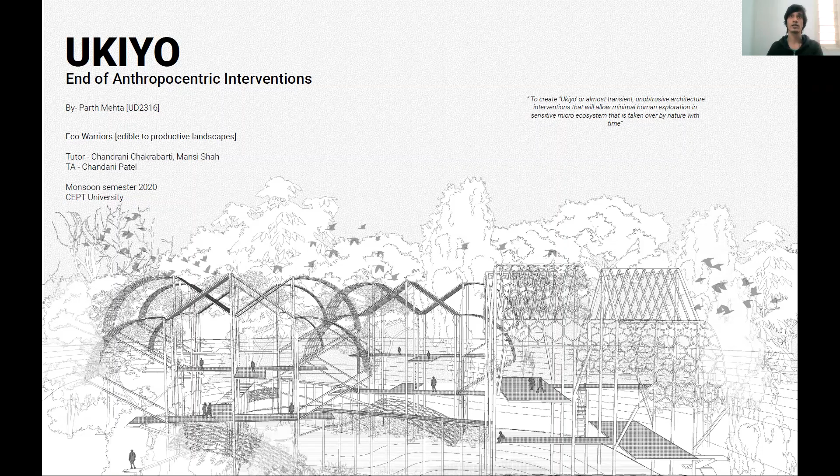Myself, Parth Mehta. I'm a student of Bachelor's in Urban Design, and for the next 7 minutes, I'm going to talk about Ukiyo, defined as transient world. The project Ukiyo, End of Anthropocentric Intervention, tries to achieve an ideal space for sensitive microecosystem with minimum human exploration.

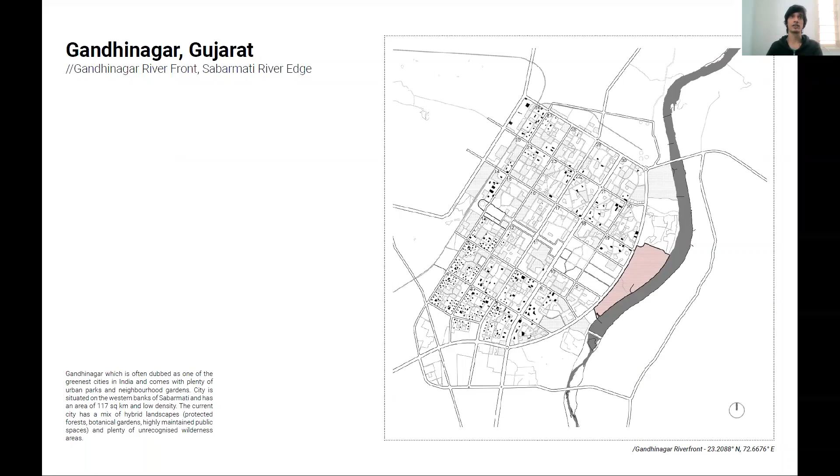The site is located on the western edge of Sabarmati River, in Gandhinagar, known as Green City. Gandhinagar has plenty of urban parks and neighborhood gardens. Cities with a mix of hybrid landscapes such as protected forests, botanical gardens, and highly maintained public spaces also consist of unrecognized wilderness areas. Due to the geography of the site next to the riverbank embanked by dam, the water level on the edge of the site is preserved. This has provided soil enough moisture throughout the time to preserve the green and allow different species of trees and vegetation to survive.

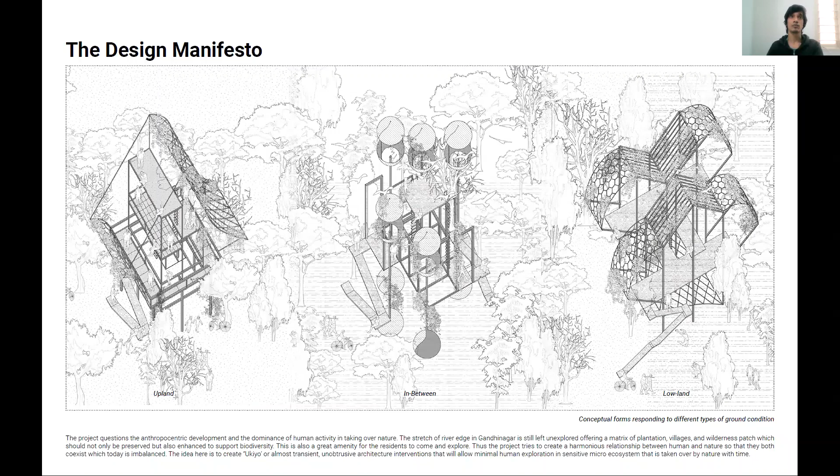In order to create a harmonious relationship between human and nature so that they both can coexist, Ukiyo, almost transient, unobtrusive architecture interventions are introduced. The design methodology addresses the importance of preservation of existing and exploring potential spots for sensitive interventions. On the right is a step-by-step process and considerations made by detailing the master plan.

First step was to analyze the existing topography and land cover. With that, overall swale and water catchment network was formed with juxtaposition of natural trails. With extremely less footprint of less than 1% of overall site, architecture interventions were introduced with respect to the different ground conditions.

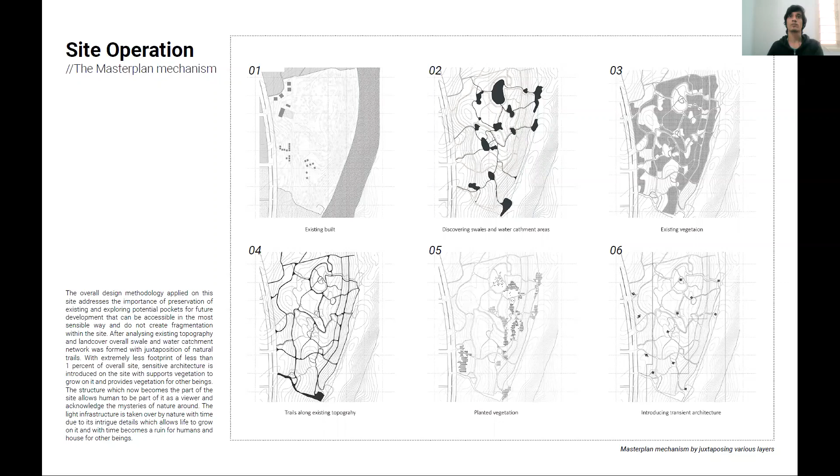Gandhinagar riverfront is spread across a vast area, 1.4 kilometers in the north-south and 1.2 kilometers in the east-west direction. The transient architecture is based on the response to the ground condition that defines the nature of microecosystem existing on the site. The master plan of the patch near J Road is upland patch.

In the center, due to existing topography, there are areas where water gets collected during certain months of the year, allowing varied vegetation to grow, and acts as a habitat to many birds and organisms. We call it in between. The hatched area at the river edge is riparian zone, hence it's preserved.

The small fragmented patches are introduced with varied plantation palette, which can provide feeding zone for many birds and small organisms. Walkable trails are explored with minimum cut and fill that allows exploration across site. Existing trees are left untouched, considering the habitat of various other beings.

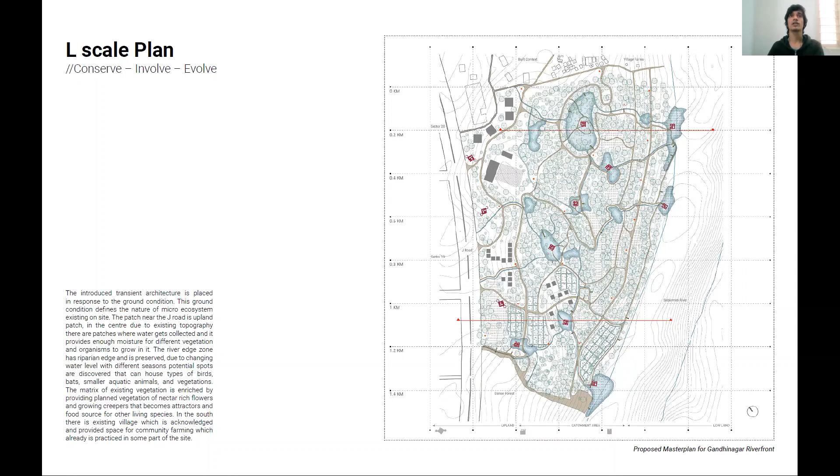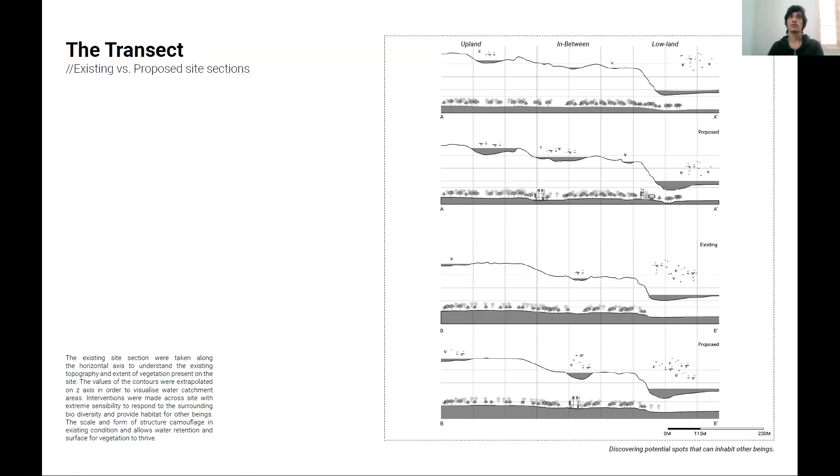The image shows the existing and proposed site section along horizontal axis. In order to represent depth of the site, the value of the height is extrapolated into z-axis in order to visualize the water catchment areas. The balance is created in the scale of existing nature and intervention, such that it camouflages in the wilderness. This allows water retention, surface of vegetation and habitation for birds, small mammals, insects, and more.

The attitude towards bringing nature back in the city is confined to sparsely developed parks or very high maintenance formal landscapes. But here, giving back to nature is by inhabiting architecture in the ring of wilderness. Uplands are the areas lying above the elevation that represent the vast majority of land areas, including rock outcrops, scrublands, grasslands, and dry forests. Such landscape is introduced with architecture specific to it.

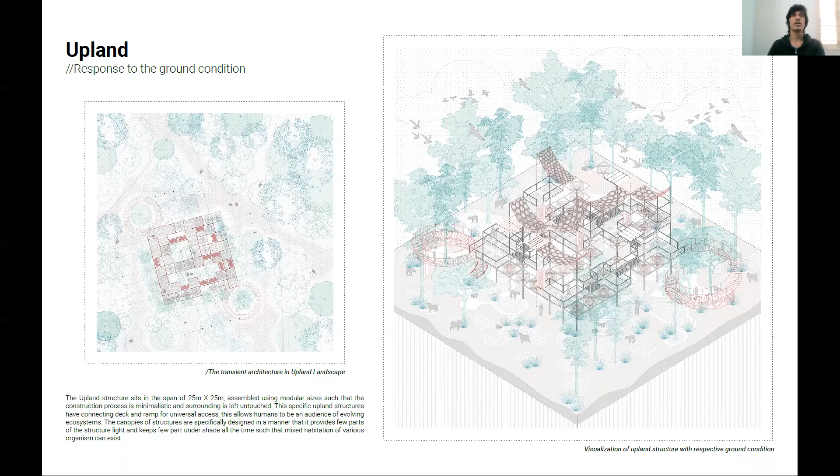The structure spans 25 meters in XY axis, assembled using modules, in order to minimize disruption and leave maximum spaces untouched. As visible on the isometric drawings, ramps and decks are provided considering connection across structure and different levels. The upland structure tries to bring nature in and acts as a foraging ground for various organisms.

With grasslands and dry forest around, the height of the structure is restricted to 15 meters to camouflage with trees around. The canopies of the structure allow light to penetrate and also provide shade to certain parts of the structure. This allows mixed conditions for varied biodiversity. The decks provide a viewing experience for nature enthusiasts and porous volumes allow accessibility across modules for other beings. This structure is then a framework for life to grow on it.

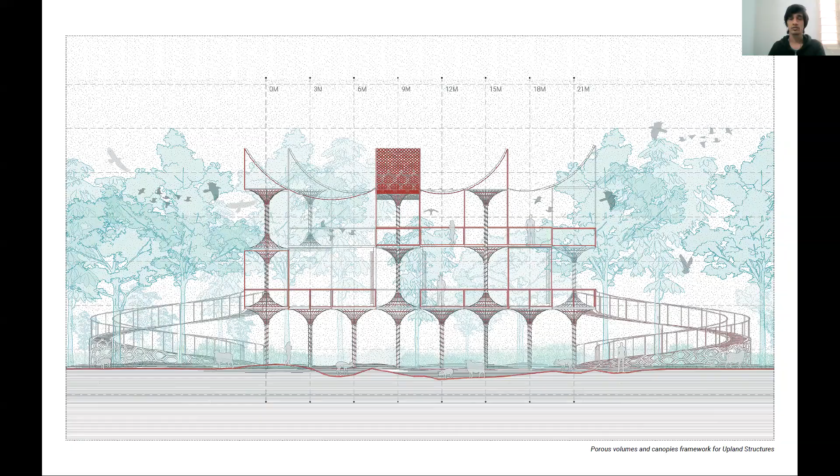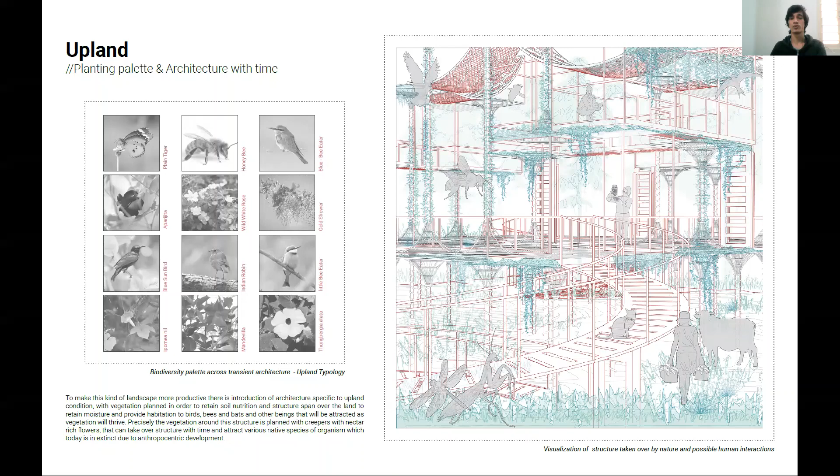The in-between landscape provides many societal benefits: food and habitat for fish and wildlife, including threatened and endangered species, improving water quality, shoreline erosion control, and more. The porosity of the structure allows light to penetrate to the ground surface, with limited decks and an exclusive layout of staircases. Humans are restricted in parts of the structure, while wilderness will grow with time. The accessible decks are spread in a manner that allows only visual access to humans.

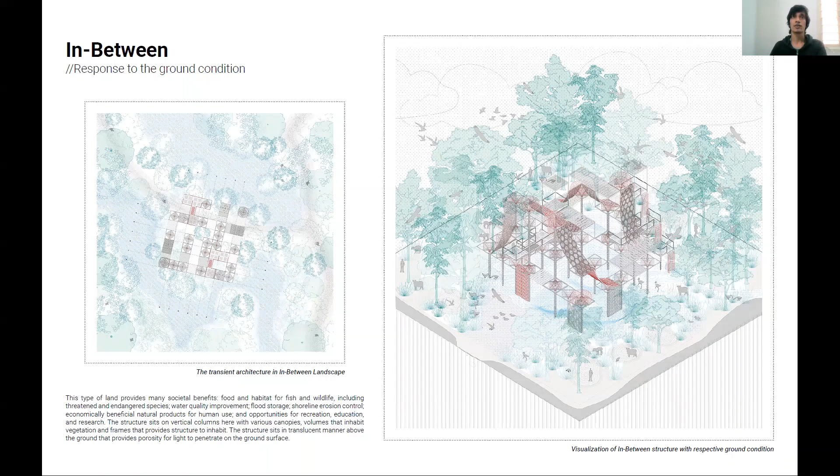The canopies are framed across the structure in a manner that habitat can be created on each and every level. The structure sits in between soggy soil, water-loving plants, and water. With availability of water, vegetation can thrive throughout the year, which allows food for other beings that will inhabit the structure. The form is achieved considering utmost porosity and frame structures that are inspired from nature. These different types of framework are suitable for different species. Hence, with time, the structure blends in nature and a functional microecosystem evolves.

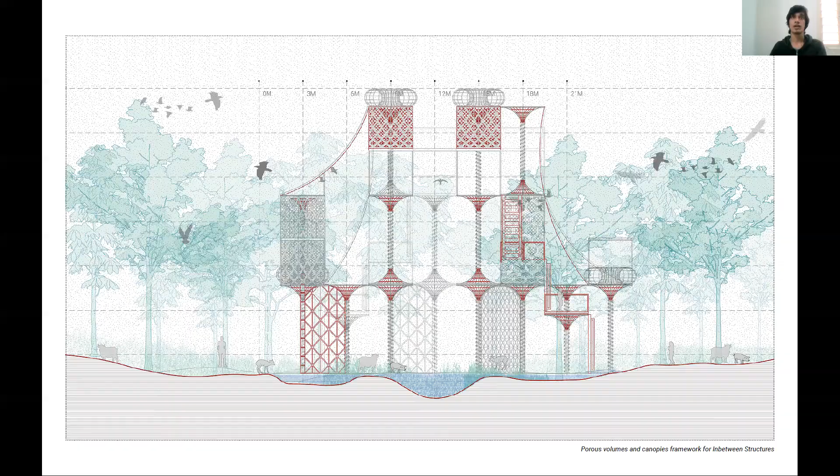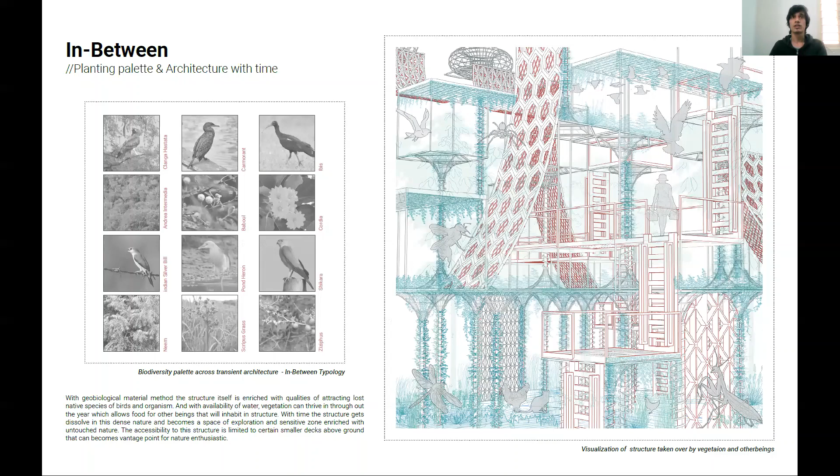A rich native vegetation palette is introduced here in order to enrich untouched nature. With nectar-rich flowers and habitat, birds like shikra, ibis, and many more are attracted. On the right is an illustration of nature taking over the structure and using the framework to let nature thrive by itself. The space between becomes valuable in terms of the life it offers to other beings as it sustains.

Here, the interface between the land and the river is rich in the terrestrial biome found at the Gandhinagar riverfront. The edge encounters different water levels across the year, and hydrophilic vegetation has thrived on the soft edge. These zones are conserved due to the riparian quality. The structure stays on columns across the river edge and partially touches the river bank. The structure with dense framework allows water plants to grow, creating a biofilter and stopping excessive pollution entering during surface runoff.

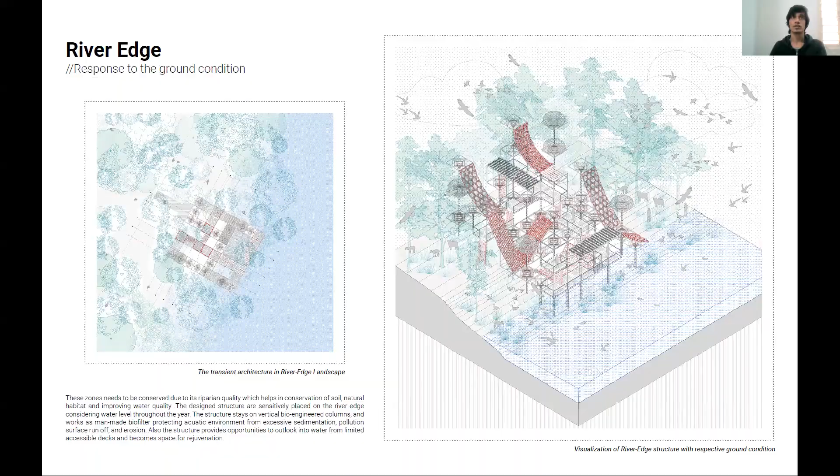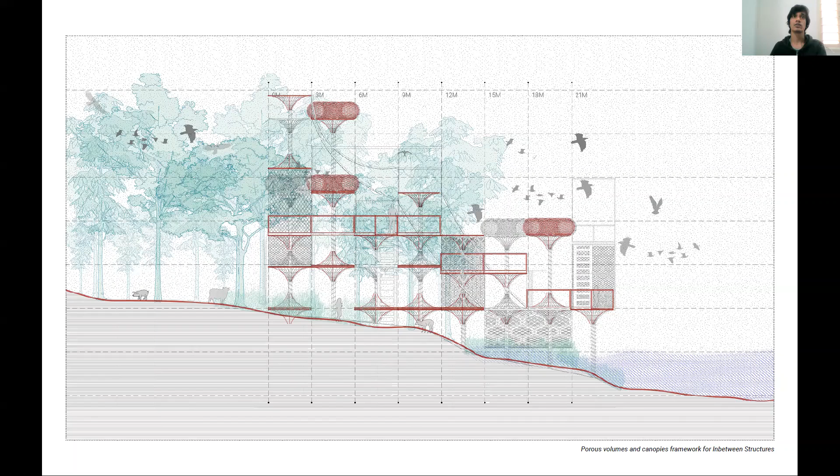The river edge structure with its large open canopies and framework underwater provides foraging and feeding ground for the birds and other beings. The structure becomes a source of food and shelter to many aquatic and terrestrial animals, which helps in the biological restoration of the space. The idea here is to create a self-sustaining mechanism with the nature that inhabits it. The palette provides food and attracts different terrestrial animals on the river edge. This will help in biological restoration of the space. The structure hosts varied organisms underwater and on land considering water level.

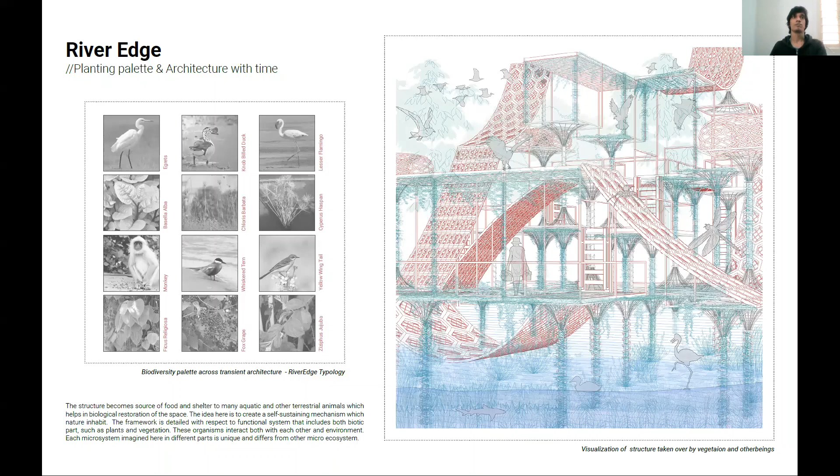Biodiversity is totally a web of life. Thus, we have to think beyond site in our understanding, in our neighborhood, and in our city. The sensitive network across the city is speculated considering wilderness in the urban fabric. With a sensible and minimalistic approach, humans are now the audience of an evolving landscape shaped by nature.

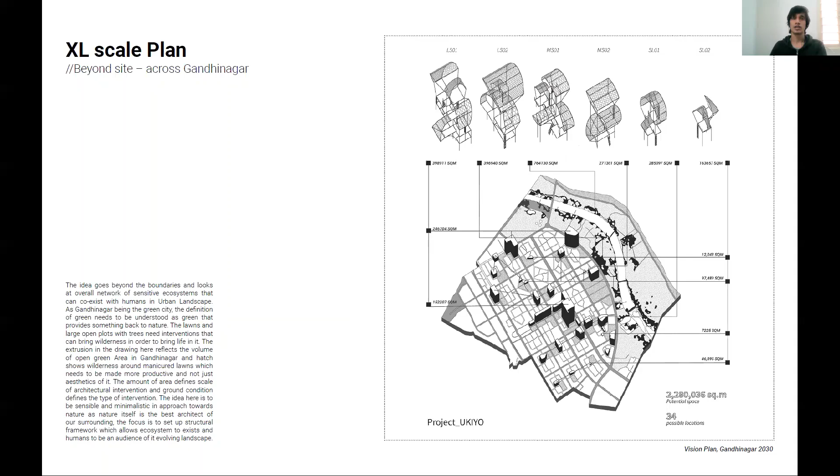The image extrusion shows the quantity of open space available, and with area metrics, suitable transient structures that can be camouflaged with the scale of the surroundings and with the type of ground condition. This unsettling scenario defines a different position within our environment, overturning our relation with urban nature and giving us the role of guests in a city.